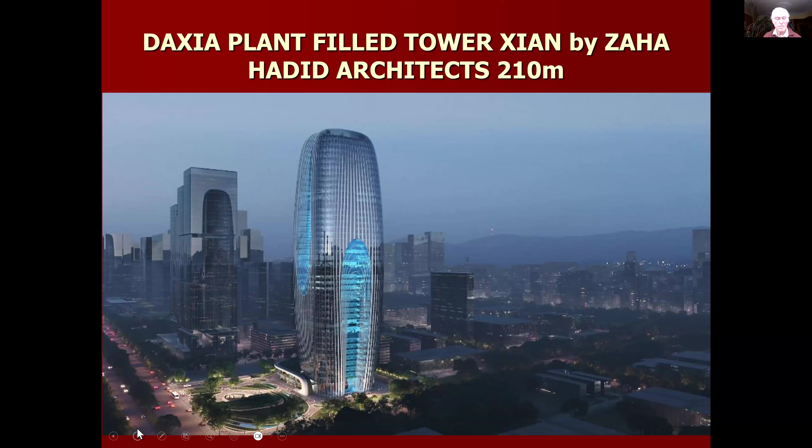I'm starting off by showing you the Daxia plant-filled tower in Xi'an. You may have heard of this building or maybe not. I'm showing it because it shows the shift we're getting in talking about intelligent buildings. One time it's all about the digital devices, about a high building like this—210 meters high, I think—and about the structure, about the materials. Well, of course, all those things are still important, but this building is different in the sense it's full of plants.

It's interesting that in China, they took the view very strongly that biophilia, greenery, our connection with nature is vitally important, so important it affects our decision-making. So the thought is that in this building, decision-making will be better, happier people, better decisions, more efficient working. This emphasis on the sentient quality of buildings, as well as the technical abilities of the building, is really important—in a social sense, in an individual sense, and in a corporate sense, because if you have a happier workforce, your outputs are usually better and more effective.

So I'm going to center a little bit more on people, but with some of the technology that will move forward in the next few years—and it's happening already, of course, at a very rapid pace. Zaha Hadid's company did this building. It's not going to be with us until 2025, I think is the date at the moment. So this is something quite new and quite striking, I think.

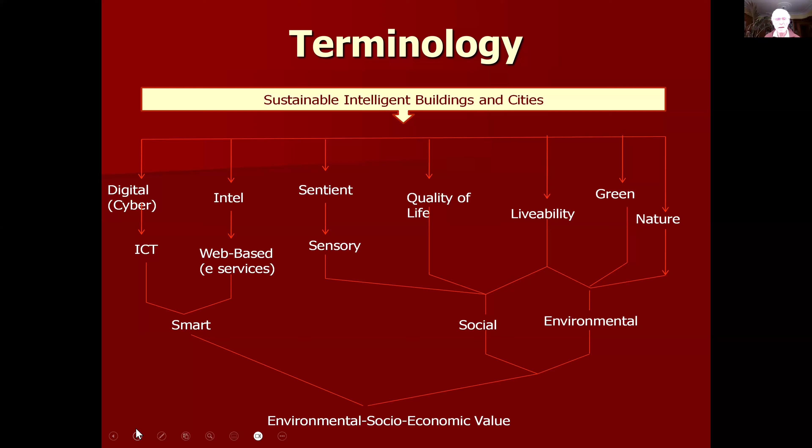So where can we progress? Where can we develop intelligent buildings? I think the knowledge base is based on basically four main things.

One is the history. We know that passive design is critically important in buildings because generations before us in various countries around the world have adapted their buildings for human use, whether it's very cold regions or very hot regions.

And then this connection with nature. What can we learn from nature? Lessons from nature. Of course, we have technology, and everywhere you go today, every newspaper you pick up, the AI acronym is there. Let's look at some of the technologies that are most promising and which can help.

But at the end of the day, our buildings are for humanity. That's in a communal sense and in an individual sense. Remember that architecture expresses the spirit of the age you're in.

We love to go to historic cities. We go to Rome or Florence or Bath in England or Edinburgh in Scotland, and Xi'an in China, and many other places. People like to visit their historical sort of cultural background.

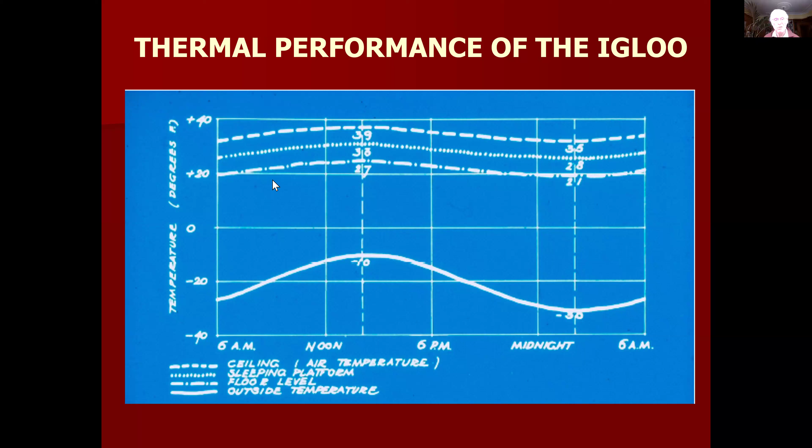The Queen's Building in De Montfort University, I suppose, is a well-known example where the lecture room operates with a sort of solar tower. There's some modification at the top with the glass in the case of the UK, but nevertheless, it's the same principle. It's dragging the air by a buoyancy to cause the airflow.

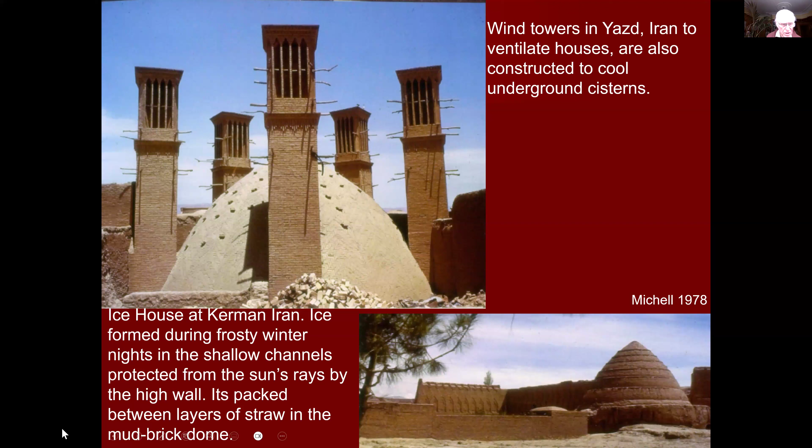And of course, around the world, we see many examples of troglodytic living, where people have used mountainsides to actually live in or build places. Cappadocia is another example in Turkey, where there are these sorts of cut-ins to the Hittite mountains there.

Coming forward to much nearer our time, I'd like to show you an example of a really good intelligent building, one of my favorites, in fact, that is in Noumea in the South Pacific, designed by Renzo Piano. It's a museum of Noumea, a cultural center.

Renzo Piano, to get this building right, looked first at the Kanak people, who were there from a long time ago, and saw how they dealt with comfortable living places near the Pacific Ocean. The Pacific Ocean has many moods, salt water sprays, high winds, and so on, so there are a lot of things to think about in that region.

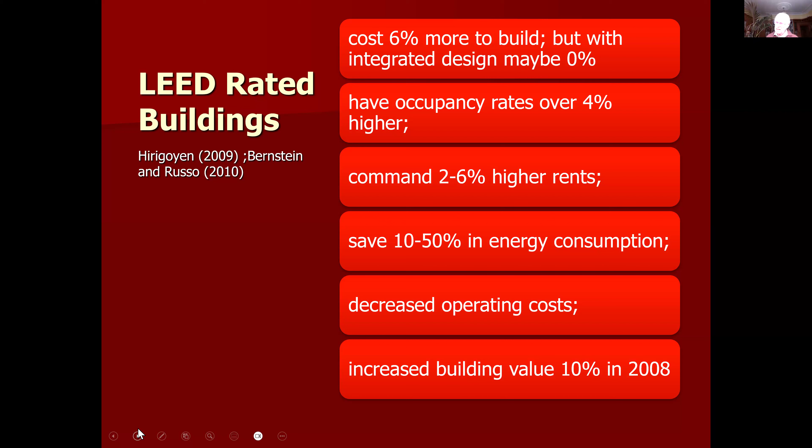They show that in general, LEED-rated buildings — or it could be BREEAM, or other rating systems — tend to be healthier and better. Now, there's no formula for this; it's an association, a trend, but that's another real advantage. This is where you see climate change credentials and health and well-being things, the human things, and the climate change demands for the Earth are kind of related. They go hand in hand.

Now, a little bit about people. At one time, when you designed an office or a school or whatever the building was, the emphasis was on utility. It had to be practical, you needed to use it, it had to be efficient in use. That's fine, and that's still important, of course. There was less emphasis put on how people felt about it — there was a general thing about comfort, and I'll say more about that in a moment. But the building is for the use of people, so the human value is really very important too.

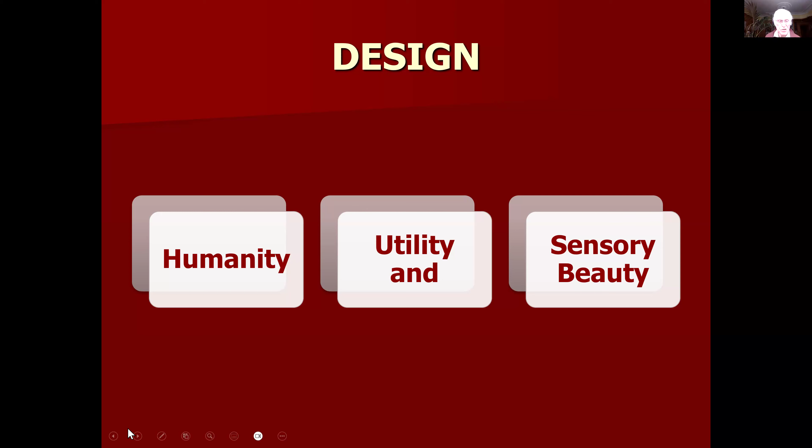Now the next thing is the mind and the body and relationships, and Maslow talks about this in his hierarchy of needs in 1943. First of all, the mind and the body are interrelated. We often talk about buildings, and if we talk about air quality, we tend to think about the lungs and the breathing and so on, a little bit less of how air quality could affect the mind and affect concentration and so on.

And then the other aspect is social relationships. We need social identity, we need the dynamics. The pandemic showed this very clearly, that school children who often complain about school actually began to miss school, and the reason often was because we miss meeting our friends. The same in the office environment, the dynamics you get from meeting people, either formally or informally, have a value and often spark off ideas and innovation and all sorts of things.

But of course there's also times to be away from that. So today we're seeing the development of hybrid working, where people work at home or work in the office, and there's a balance between them. So maybe that is ideal. People don't realize how much the environment affects the mind, and in a world today where mental stress is much higher than it has been across all age groups, this is very important to take account of. We'll say some more about that in a moment.

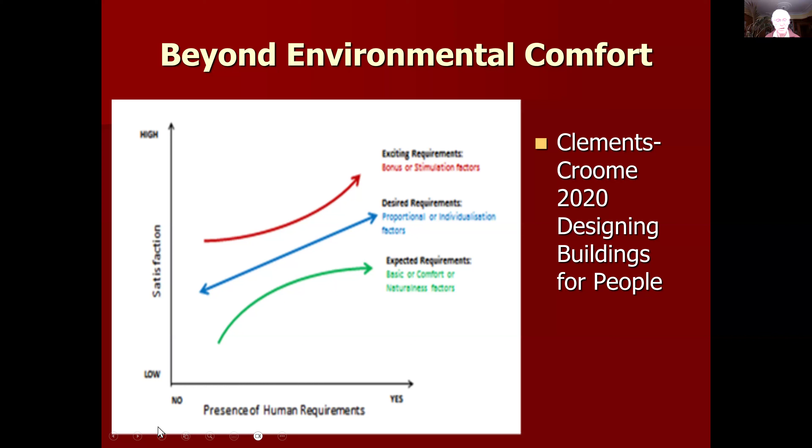So I'd like to encourage everyone to think beyond comfort. Comfort is really like a health and safety backcloth, a background, but on its own it's not enough. We need more than that. Let me see if I can get the next slide.

My flourish diagram is here, and it's basically saying that the environmental factors have an impact on perception, your feelings, your moods, and on the economic aspects of the result. If you ignore this and don't get good environments, you will have more absenteeism, and you will have more people leaving the company.

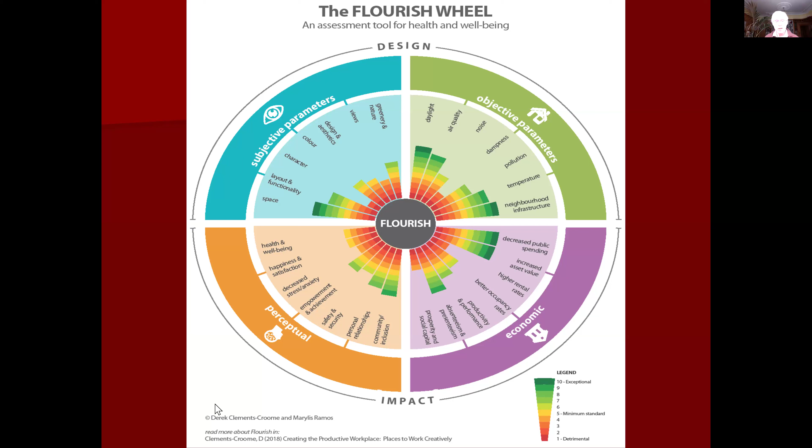So there are economic outcomes if you don't design buildings better. If you look at the top 50 buildings in the economic world, in the FT for example in England, you will see that most of those places do have good buildings, good places for people to work. Having a good environment is partly the way a company can show they care for the people in the workplace, and when people don't have that feeling, things don't work as well. So bringing together the care, the leaner environments, the greener approach, saving energy—it all comes together.

Now I'd like to move to that second phase, which is nature, and then I will go to technology.

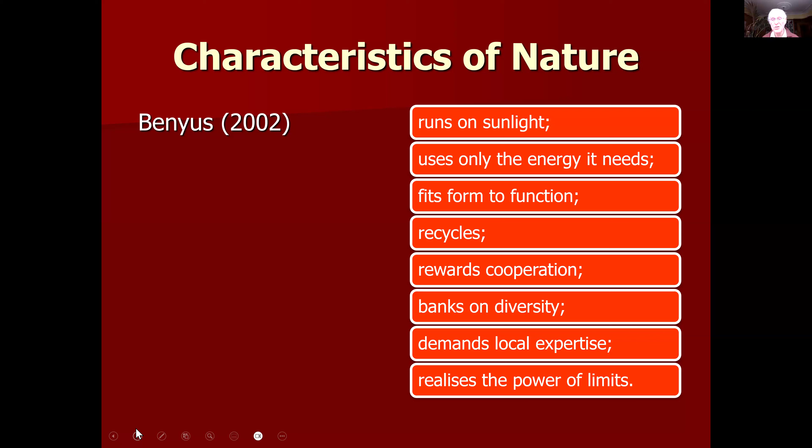Characteristics of nature, I think, are fairly obvious—sunlight is there, but you can read those things on the screen afterward. What I'd like to really emphasize about nature is that it optimizes its use of energy and materials. If we did that in architecture, that would be a great step in the direction of addressing climate change. And of course we do try to do that—it's not that we don't—but the thing about nature is it always does it, and finds it natural to do so, whereas we struggle a little bit to achieve those things.

I mentioned organic architecture already, looking at things as a whole. The Kaufmann House by Frank Lloyd Wright, Falling Water, built in 1936, is an example. The harmony between the house itself, the people living there, the green surroundings, the water, and the sound of the water are all beautifully integrated in a very sympathetic way. This is a well-known example, but there's no reason why we should not be able to have organic approaches which bring things together in an integrated way in all buildings. It's not a luxury—the things we often call luxury are not the aspects I'm talking about. We're talking about imagination and creativity, and those can be achieved by bringing things together the way Frank Lloyd Wright did.

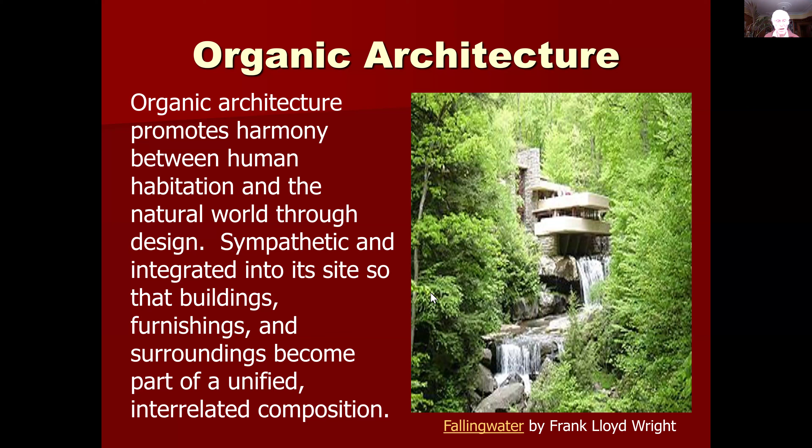If we move to the work of Frei Otto, a famous architect who died about 4 or 5 years ago, who I was fortunate to work with in the 1980s within a team. When I went to visit him, he showed me his laboratories in Germany, with lots of spiders' webs and things hanging from cotton threads. His inspiration had originally come from spiders, and I've selected two species here because their webs are very architectural, very structural, and look like lightweight structures. Frei Otto made his reputation very much with lightweight structures, such as the Munich Olympic Stadium, among many others. And the spider—if you've ever watched it generating silk and seen how strong that silk is, as we all know—it's really a marvel of nature, the spider. It's quite remarkable.

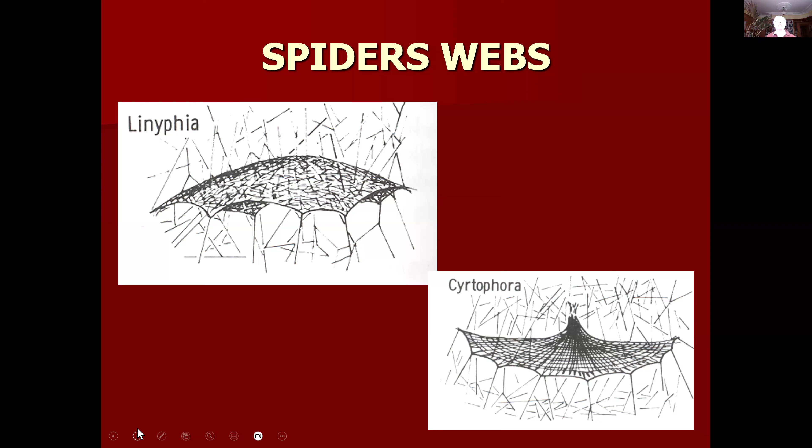But this was the inspiration for Frei Otto. Termites are often quoted in this respect because they have a natural buoyancy within their termitary of being hot in the center, hot air rising, falling, losing heat, coming back down again, natural circulation. And this was the inspiration for architects doing the Eastgate office in Harare, Zimbabwe in 1997. This atrium here, this natural sort of circulation was part of the plan.

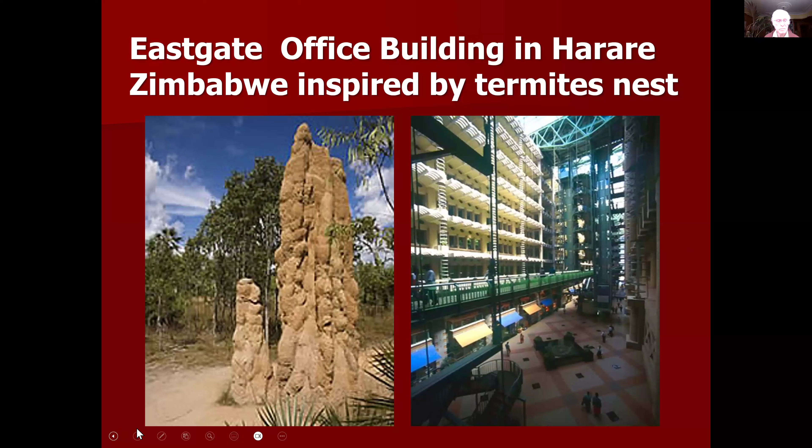One that you may be less familiar with is the camel's nose, and this is something I learned about fairly recently, the last 2 or 3 years. Why is the camel's nose interesting? Well, of course, keeping the sand out is one obvious thing, but it also acts as a humidifier and a dehumidifier in every breathing cycle. This inhalation, humidification, and dehumidification exhalation process results in a 68% or so saving in water. There's research on this, and the United Nations are using this model as a demonstration for water conservation. It's examples like this which I think are really exciting.

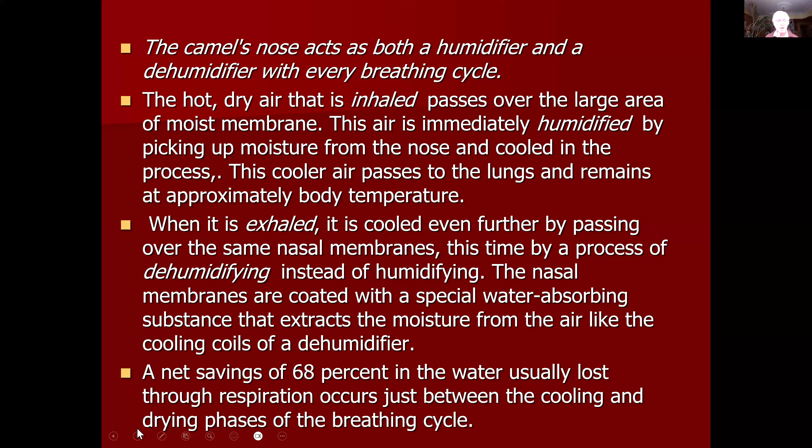Right, so now the benefits of biophilia are several. First of all, in terms of human beings, in terms of stress, social engagement, and exercise, effects on mental health are really very important. They're shown in general park and green space areas - there's less crime, there's less loneliness, so there's a lot of good things.

And the other part of biophilia is, of course, that if you measure the leaf surface temperatures of trees and bushes, as I did a few summers ago here in my home, they're several degrees lower than adjacent brick or concrete temperatures. That's the basis of having a cooler city when you have more green around - it takes away the heating effect. The advantage of having a bio facade in a building is that it will be basically cooler, and in hot climates that means air conditioning costs and so on are going to be lower. So there's two aspects of biophilia: one is the human being, mind and body, and the other is contributing in terms of climate change potentials.

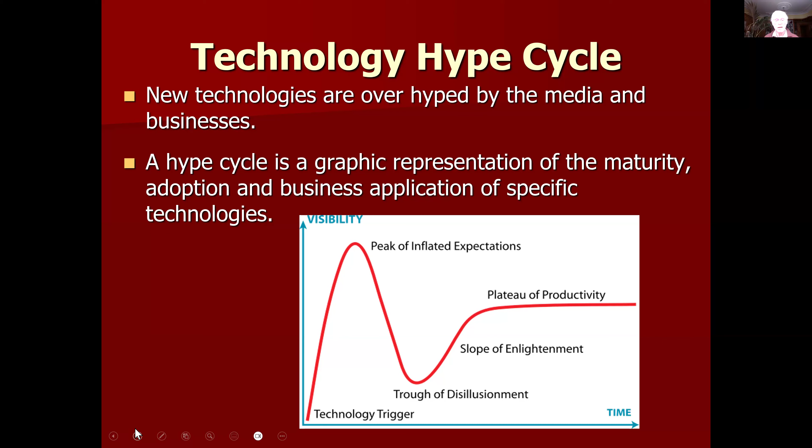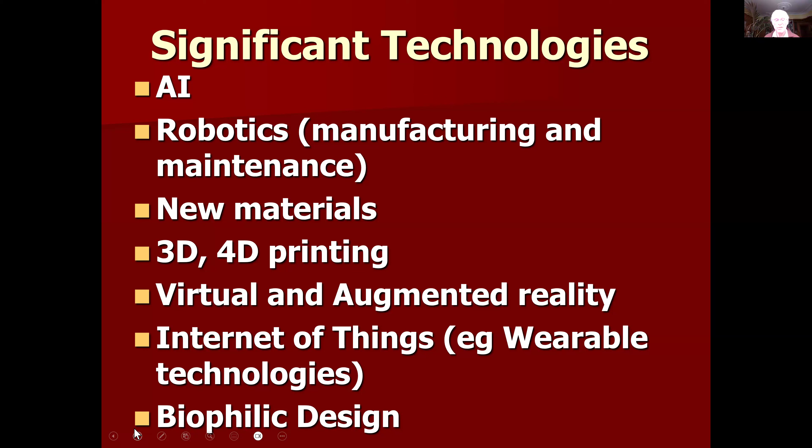Now I will show a little bit about technology - I've got to speed through this a bit. I want to say enabling technology is good, but technology for its own sake is not. We often get excited about technology, and a lot of it doesn't turn into anything very much, but some does, so we have to be careful about selecting the technologies we want. AI is important because it brings a thread of different things together, like a big network base. But robotics in manufacturing and maintenance, I think, are beginning to show in an interesting way in the construction industry. New materials, 4D printing, virtual and augmented reality, the Internet of Things, wearable technologies, and our connection with nature - I think all of these are major ones that are going to steer us through the next decades.

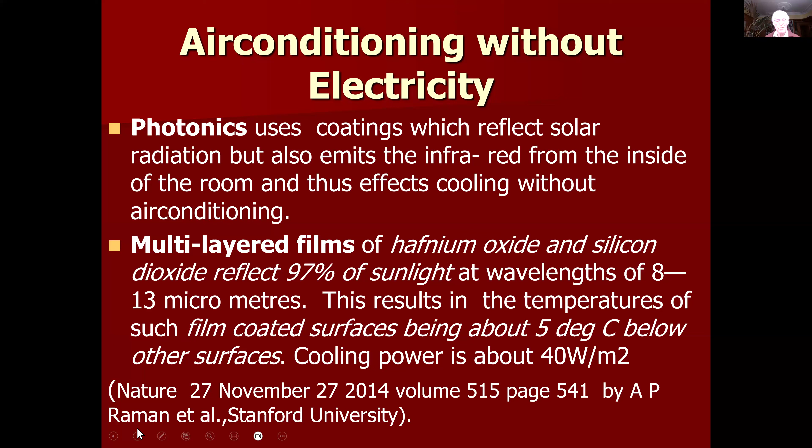Air conditioning without electricity, the field of photonics, for example, using coatings which reflect high amounts of solar radiation, are important - things like hafnium oxide and silicon dioxide, reflecting very highly, 97% of the radiation, ever getting cooler. Graphene, of course, atomic scale, the lightest, strongest, stiffest substance known, with self-repair. Other things like phosphorene are being developed. The point here is if you embed graphene into even traditional materials, you can alter their properties, and therefore play with materials to get the properties you want with respect to the molecular structure.

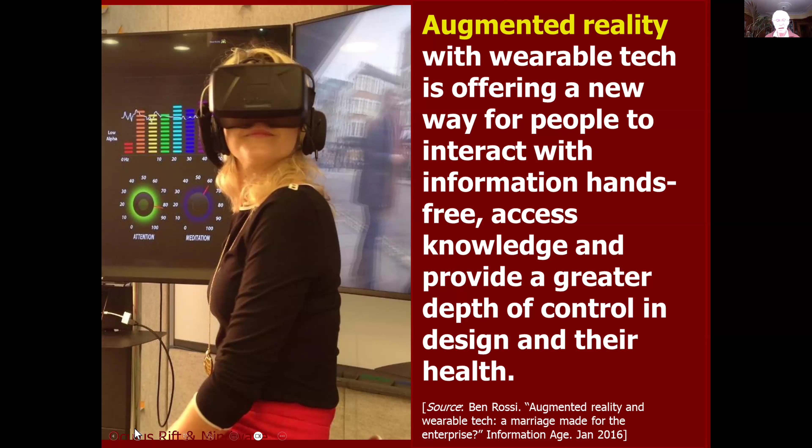Augmented reality is a way for people to interact with information and actually interact with designs, because people can look at the designs they're being presented with, and the client can take part in the design process. So a client-centric design is really effective. We are in a sensory world, and we do need to try and be more aware of our actions in buildings, because however well you design the building, it's the people who use the building. We know that human behavior affects consumption, whether it's water, gas, electricity, or whatever, because some people are very conscious of these things.

Some people are less conscious about these things, or it's just because we didn't know. We never realized how much electricity we use in a day making pots of tea, or simple things like that. But now we can measure these things very easily, and it's not very expensive. So hopefully, as we get more aware, we will use things in a better way. We talk about net zero carbon.

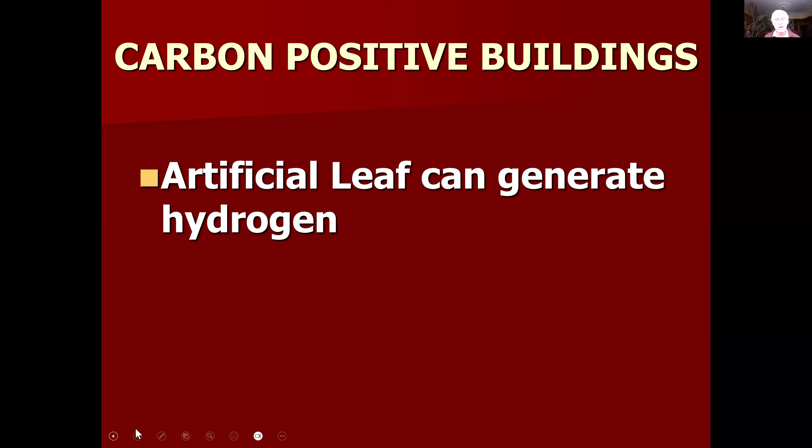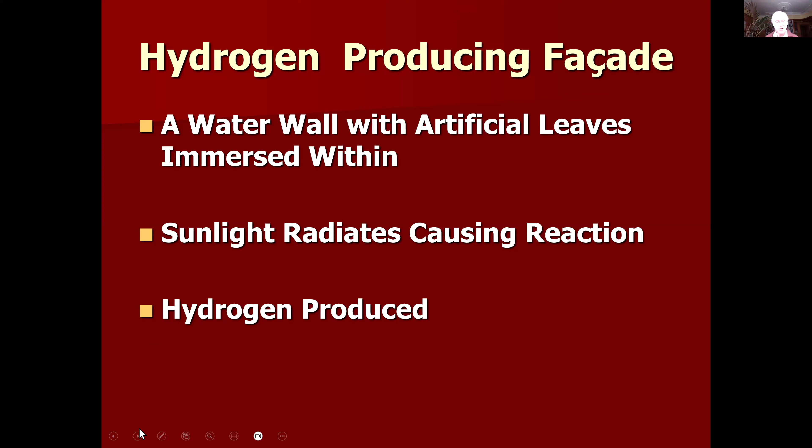So a water wall with artificial leaves, with the sunlight radiating, causing a reaction, produces hydrogen which can be fed to a fuel cell or whatever. Some case studies very quickly.

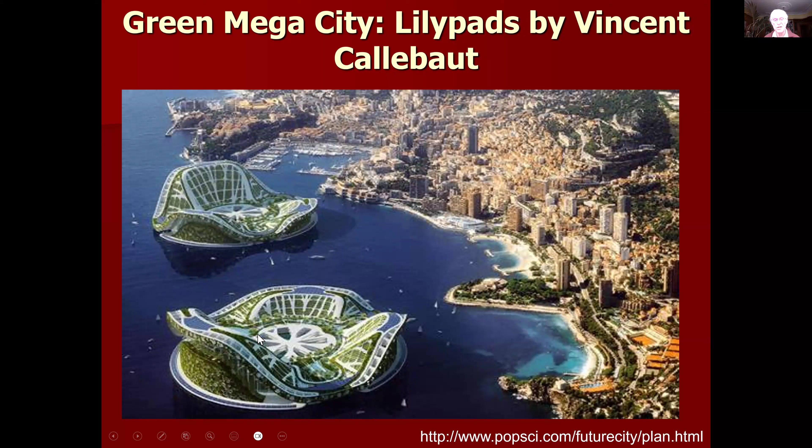I'd like to mention the work of Vincent Callebaut, the architect born in Belgium, works in Paris, and his floating cities for 50,000 people, so very small in respect. Floating cities inspired by the water lily. In these cities, you have titanium dioxide skins to absorb CO2, and electric pod cars.

Biodiesel electric buses, use of footstep energy, because as you're insulating more and your operational energies go down, your embodied energies become more important, and things we ignored before become more significant. Footstep energy is one of those things.

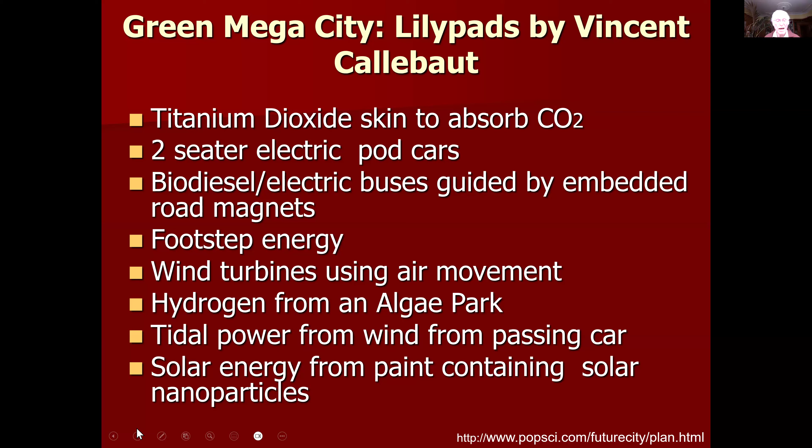Wind turbines using air movement, hydrogen from algae parks using photosynthesis again, tidal power from the surrounding water, and solar energy from paint containing solar particles. Desalination, robotic maintenance, bubble houses for people to live in, phase change materials, hydroponic farms which don't use earth but nutrients to feed plant structures, plant water from sewage, and geothermal wells using the seabed as well.

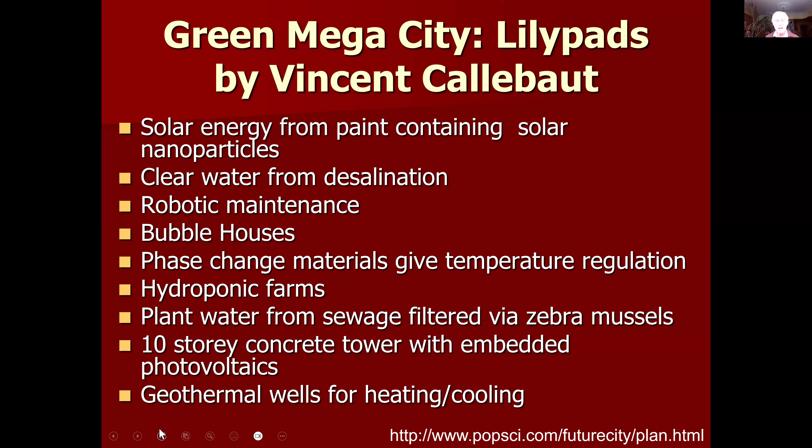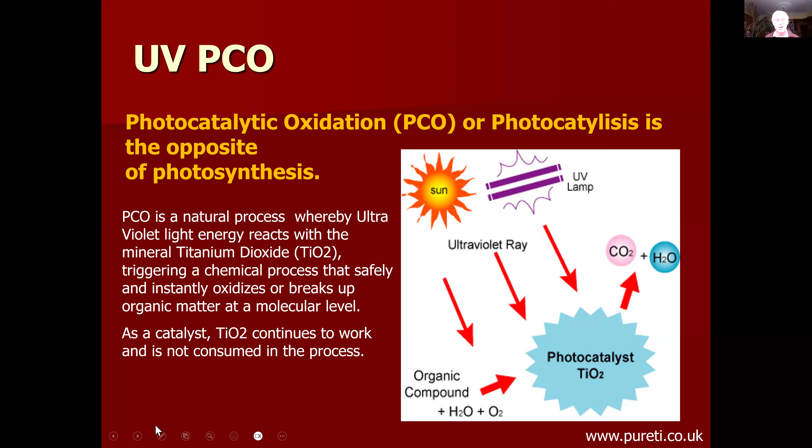The marvels of titanium dioxide - there are disadvantages in some respects, but it's worthwhile seeing the possibilities. Ultraviolet rays from the sun interacting with titanium dioxide clear dirt off buildings. This is the substance that, like Pureti is one example, improves the air quality in the environment.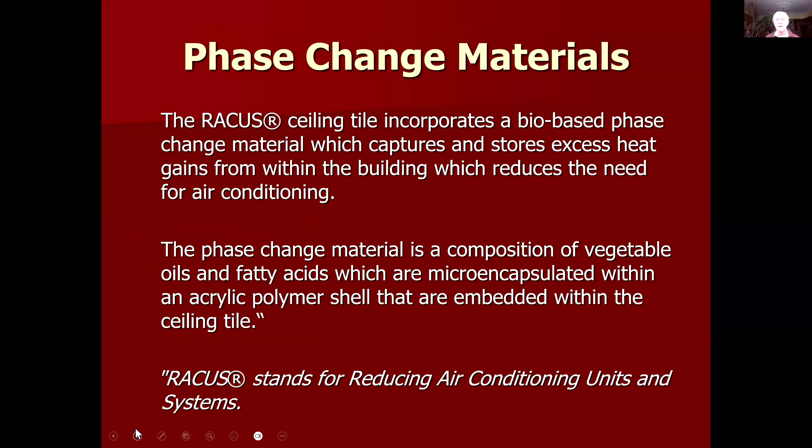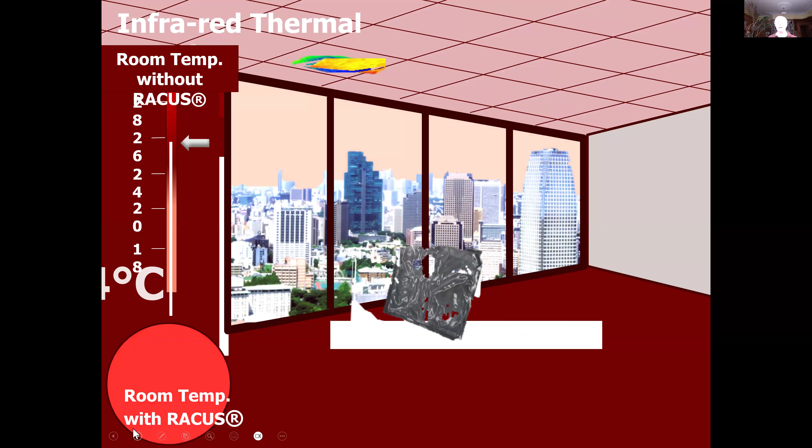Phase change materials consist of fatty acid cores, and the actual range we're talking about is 22 to 24 degrees. As you can see, the heat goes up, then comes down at the limit, and starts coming down again. So you're getting hot and cooling using these substances, which have a temperature across the evaporation change of phase of about 22 to 24 degrees, near the comfort zone.

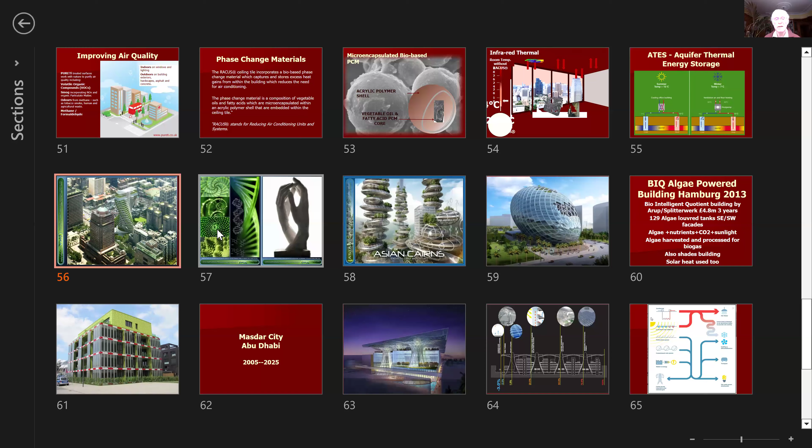So I'd like to emphasize our connection with nature here. Our hands - we're embracing nature. This is the symbolism. We also recognize the fractal beauty - when we look at nature very closely, we see the fractal patterns. Fractal patterns are part of our invisible visualization, but it's invisible because it's something we sense but don't actually see with our eyes.

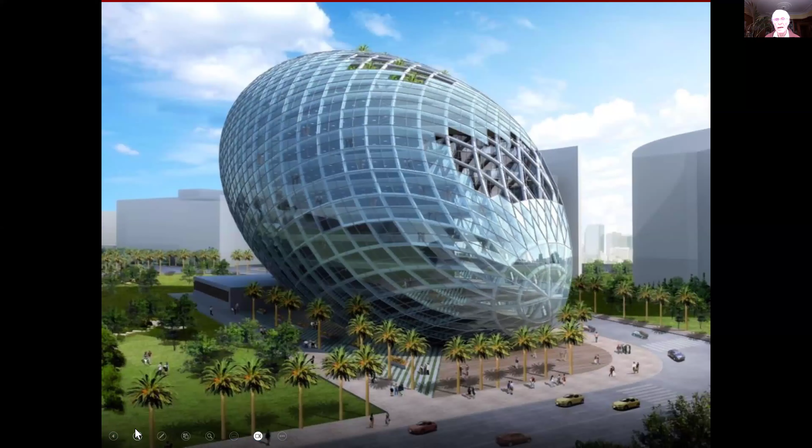There is another Asian Cairns building by Vincent Callebaut, scheduled for Shenzhen. James Law in Hong Kong - the Mumbai Egg. This is in India, completed about two years ago. Each panel has what we call a cybertecture approach, meaning each panel actually has digital devices within it, giving very close monitoring of everything going on.

The BIQ algae-powered building in Hamburg, 2013. You can see in this building these are algae growing tanks, which lead to insulating, but at a certain point, you harvest the algae and take it into biogas. So this is where an active bio-facade can be used to generate energy.

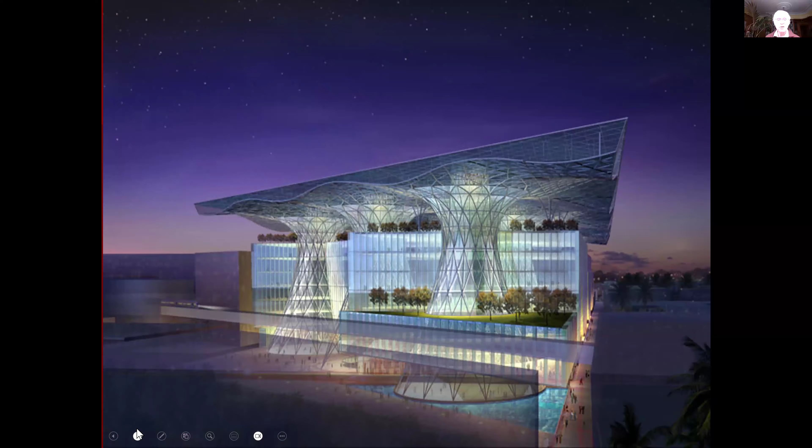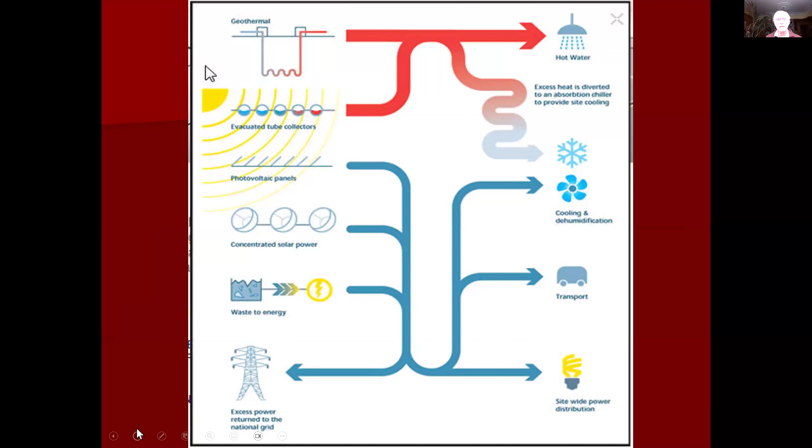Masdar City - I'm sure you're familiar with, and I will quickly pass by that, but you can see on the line here the aspects intended to make the building carbon neutral. There we can see the energy diagram on those slides.

And coming towards the end, the Deloitte building in Amsterdam, 2015, by PLP Architecture in London. In that building there are lots of sensors. You have a mobile app to steer you around the building. You have a lot of choice about where you sit, so no one has a dedicated workplace.

It's a different approach, so in general people adapt to it. I mean, there's always some people who don't like that idea. The BREEAM rating is very high, I think one of the highest in the world.

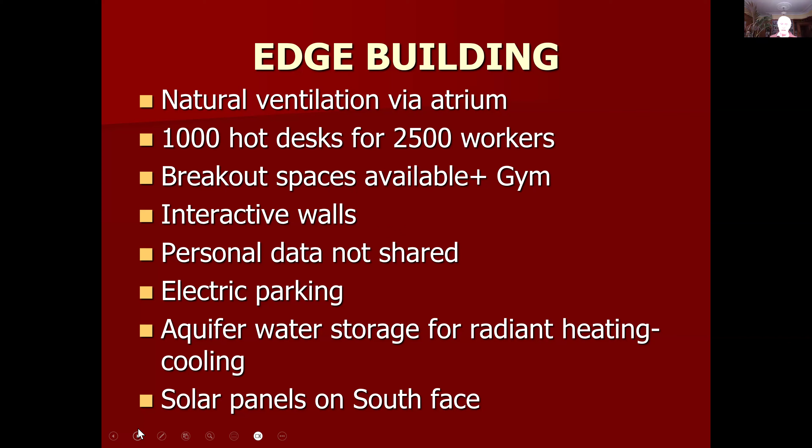So in the future, I think we should be talking more about carbon positive buildings. We should be talking more about bio facades, or green living facades, applications of biomimetics. We can see there's a lot more to discover. We're only really at the beginning. What I've shown you is a very small little eye into that field.

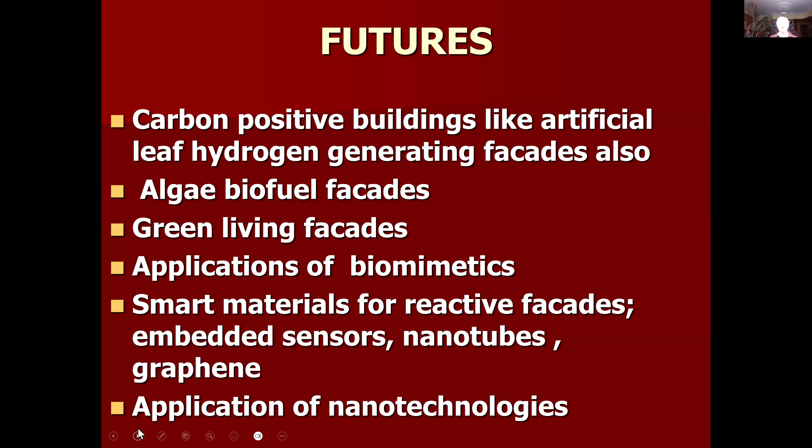Smart materials, and remembering that smart materials could be new materials, but they can also be traditional materials. So if you take concrete, it becomes smart concrete. You can now buy concrete with graphene in it, and the embodied energy of the concrete is much less. Application of nanotechnologies, robotics, full integration, using the technology sensibly.

Remembering that human behavior influences our building performance, which is very, very important. Innovation with respect for passive design. So, okay, we've got all the technology, but let's look at the simple things, don't forget them. And we need a new culture of value systems and holistic thinking in our work.

It is complicated because in practice, when we talk about sustainability, we've got economics, we've got politics coming in, we've got culture, we've got ecology. And bringing all those things together and seeing their interconnections is complicated, is difficult, and it doesn't make the topic of climate change any easier.